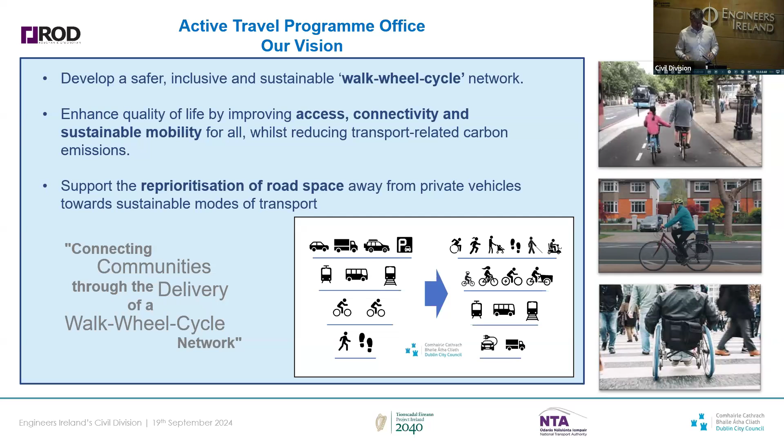So I just want to share the strategic vision that our office and the NTA have looking forward for Dublin City. There is joined up thinking. Ultimately what we're hoping to achieve is that 95% of the population will be within 400 meters of the network. I could probably do half a dozen slides on that network, and my colleagues would do a better job than I. But that is the network that we're targeting for 2028.

I appreciate it's not extremely easy to identify, but the dark blue ones there are the ones that we hope to deliver this year. So you can just about see, if the cursor will work for me. There's Clontarf to City Centre, which we're going to talk about now. Colleagues working on the East Coast Trail that opened there in the last couple of months, and then there's the Royal Canal Phase 3. There's a section of that opened up already, and so it is the hard work over the years. I'm at the back end. There's a lot of work over many years by others, and it is starting to come to the fore.

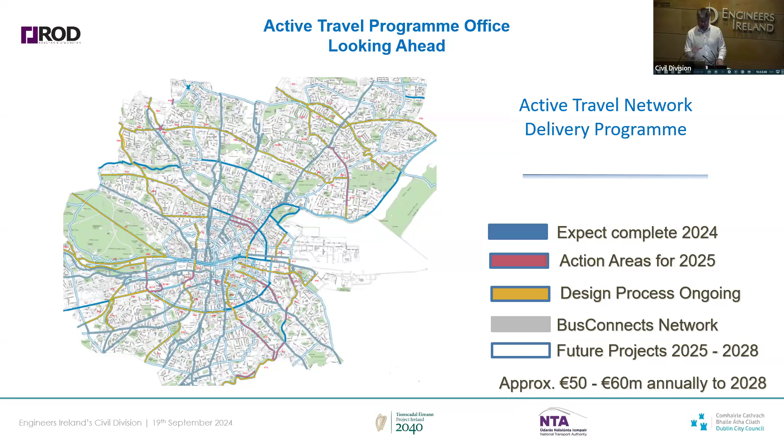There's plenty in the pipeline. 2025, you'll see Finglas Village up in the northwest, Clonskeagh to the city centre down in the southeast, and then there's more of the Royal Canal to come next year as well, and North Circular Road. Next year we hope will be a busy year for us as well, and continue getting boots on the ground and getting these schemes built. And then obviously BusConnects is all tied up in that as well, and it's essentially a cohesive plan, and there is a strategic plan there to keep going right through.

So I just thought I'd share very briefly some of it. These are the schemes that are on the ground at the moment. We were lucky. We have great delivery partners engaged with us, and the work is progressing. You can see Clontarf to City up the top.

Then there's the Dodder Greenway that opened a couple of months back. East Coast Trail, the third one that opened again. It's just opened relatively recently. You might have passed it on East Wall Road. We're down on the quays. You can see us on the quays. Just again reprioritizing lanes and access.

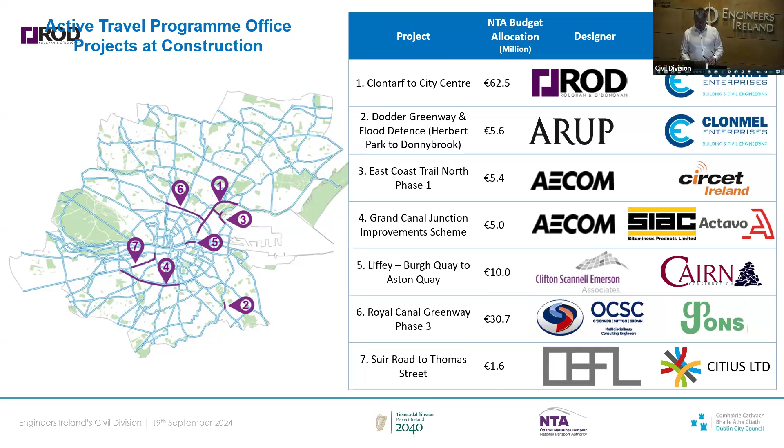And then the Royal Canal Phase 3. That's another big one that's on the ground at the moment. There's a good section that already opened, and they're on course to open the remainder of the scheme. I think it's summer next year. So they're beginning to get rolled out, and once they get rolled out, there's interconnectivity involved with all of them, and hopefully the network then will start to shape up.

Just then, we're all here. The purpose of this evening is to discuss the Clontarf City Centre scheme. As Joe mentioned, there's quite a history, and there's more people than I'll be able to mention involved in the scheme who have helped it to the point where it is today. So I think there were option assessments going back to 2012, and then it worked its way through.

We got Part 8, which was the back end of 2017. There were conditions associated with that, and there was more work for Owen's team, the ROD team, and then ultimately we went through the tender process and we landed on site March 22. March 22 is when it started. People said to me, you're 2 years, 2.5 years for a cycle track.

To be fair, as a general introduction, all the slides the guys are going to show you, it's far more than just a cycle track. It ties into the Clongriffin BusConnects scheme. We've 14 brand new bus stops that are BusConnects ready. We were the biggest water rehab scheme, I think, in Dublin.

6.5 kilometres of water main, 250 brand new public lights, massive public realm upgrades, 6 or 8 big plazas, brand new junction upgrades, kilometres and kilometres of ducting, and in general, what often goes unmentioned, the road. I think over half the area was completely brand new road construction, which is a phenomenal undertaking in the city centre. So in a nutshell, it's far more than the installation of a two-way cycle track.

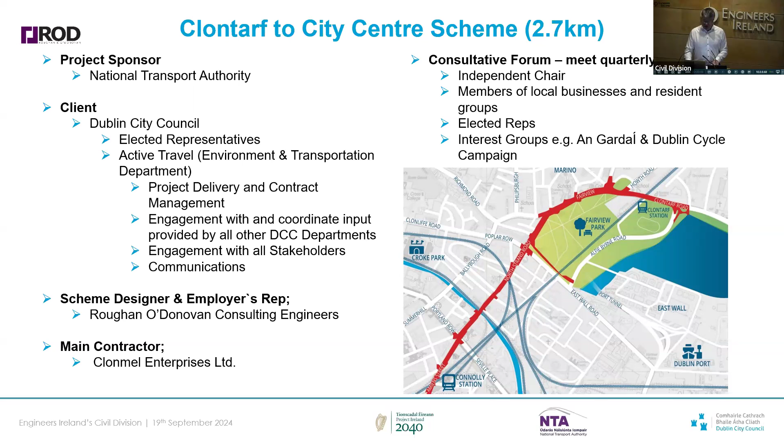There's bits that you want to communicate to the elected reps, to the interest groups, and it's been a fantastic mechanism to flag that in 2 months' time we're going to do this, or we have a design tweak that we want to do. If I was lucky enough to be on such a scheme in the future, it's been a huge benefit to us to share our proposals and share our vision and try to get as many people on board.

So my last slide, you'll be glad to hear. I just couldn't stand here today without acknowledging Chris Manzier's team and Fiona Craven. It's gone on so many years. There's a huge amount of work gone into it. But then there's also all the other departments in DCC, and for anybody delivering one of these schemes in the future, because the scheme is so extensive, it crosses so many departments. Literally the entirety of Dublin City have pulled on this one and have delivered.

There's just huge engagement. There's huge knowledge in the background that I'm learning every day. So many people are invested and have massive knowledge, and they've given us huge time, commitment, and expertise. So if anyone was involved in one of these in the future, I'd request you take the time to engage with all the departments in Dublin City, because there's plenty they can help with, and they're keen to share their knowledge. So thanks to all my colleagues there.

I will mention the business groups, residents, members of the public. We have been camped outside on the roads for the last 2 years, and there has been huge patience and cooperation. We do try and engage as much as we can, but one of these schemes can't be delivered without the cooperation of the general public. We had a significant diversion in place for 2 years, and it impacted on commuters. So without mentioning any particular group, just grateful to everyone for their patience and cooperation.

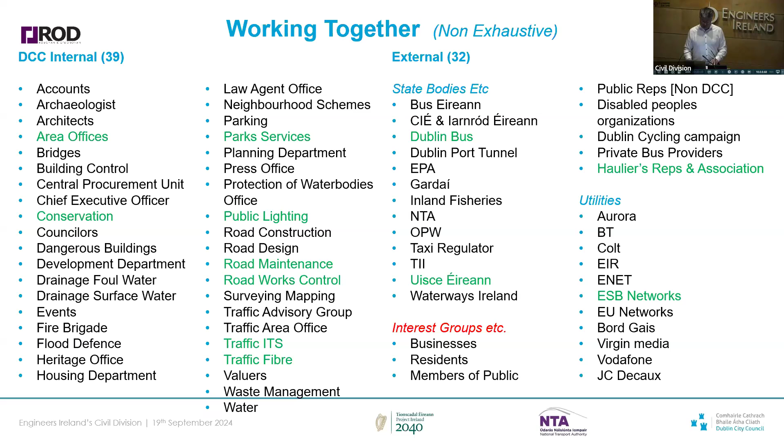So it's myself, Thomas, and Colin presenting. Thomas will go through various design details. Colin will pick up on a few more of those that he was involved in, and I'll give a general overview of various stages of the project. It's a 2.7 kilometre route, and you see some graphics I robbed from Joe here. There's an awful lot in it. Plenty of trees. We did 500 metres of the greenway along the Tolka as well.

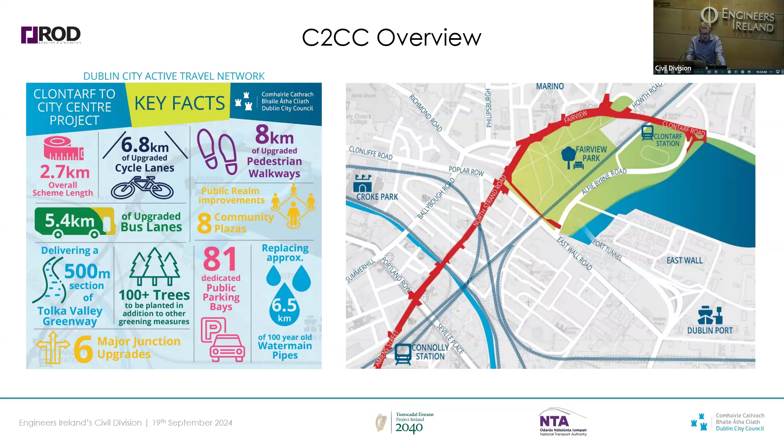That had been closed off, with antisocial behaviour under the railway bridge for years. That's open again now, and it connects to the East Wall Road scheme Joe mentioned, and also to our Dublin Port Greenway, which opened in the last few days. So it's great to see this network coming together. The guys will go through some of the complexities in the graphic on the left. So, background to our involvement. We were initially appointed to prepare the feasibility study in 2012. Then another consultant was appointed to progress the preliminary design, and that led to a Part 8 approval in 2017.

So it was actually ROD AECOM, it was an alliance commission. We did most of the design, but our colleagues in AECOM, I see a number of them here today, also very welcome. They did all the business case work for us on it.

Now, the Part 8 approval was unusual in that, well, for the benefit of anyone listening, Part 8 approval is an approval granted by the local authority to itself. So it's voted by the elected members. The elected members, though, put in a few very onerous planning conditions that took us a while to figure out. And there was a lot of controversy about trees at Fairview Park.

So the first one was to retain trees at Fairview Park, but then they introduced these requirements for protected intersections, which nobody really knew what that meant at the time, and for segregated cycling facilities at bus stops, which has given us no end of headaches for the last 7 years, and I'm sure will continue for the next 7. So basically, before we could get stuck into the detailed design, we had to redo the preliminary design.

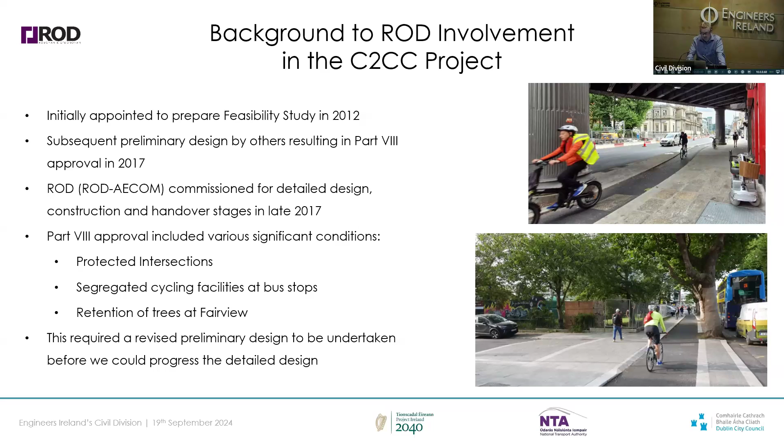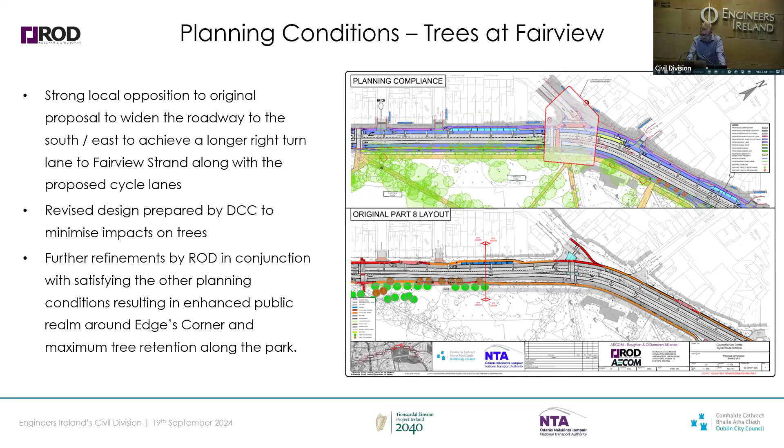So Fairview Park is a very big, fine inner city park. There were trees planted along the edge of it, and the original scheme was taking those trees out to facilitate the road widening. So we had to have another look at how to manage traffic to avoid that, which we managed to do. And so we ended up with quite a different scheme at the end of it all, but it did get us over that difficult hurdle.

The segregated bus stops, so effectively we had to separate the waiting areas for pedestrians from the footpath, because the only way to segregate a cycle track at a bus stop is to bring it behind the bus stop. You can't bring it outside the bus. So there was no end of wailing and gnashing of teeth trying to get these right, and crossings, any type of crossing is challenging for various different types of road users, and no more than all the international experience, this was a real challenge on this job. And the design of those crossings changed multiple times.

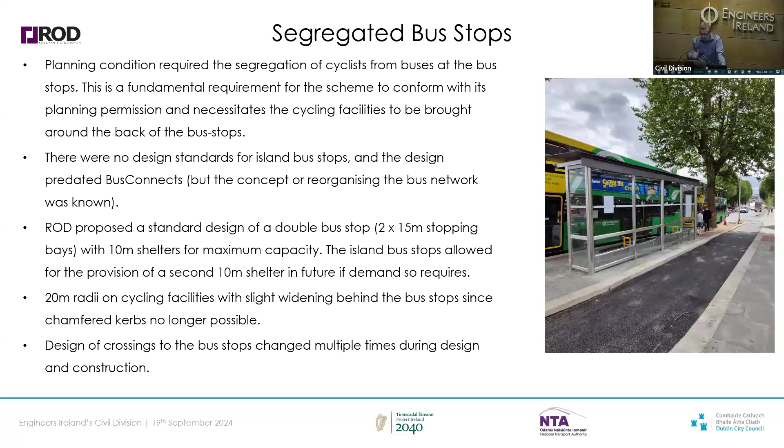When we started, it was before the BusConnects design program. The design of this scheme was basically done between 2017 and 2019. So we had no design standards to work off, so we had to devise our own design standards. And that's what you see out there today. I'm very pleased with it. We decided to allow a double bus stop everywhere we could fit it in, much better shelters than were out there, consistent treatment along the route. And then we had gentle curvature on the cycle track as you came in behind the bus stop and out again.

That's what one of the finished articles looks like at the bottom of the Malahide Road. That's Marino Crescent, where Bram Stoker is from, in the background there. This is the first picture of the scheme you see, but you see the quality of the finish everywhere on this job. This has been a very expensive job, but it's because it was done to a very high standard throughout.

So finding all the space for these island bus stops, they obviously take up a lot more room than just having a pole on a footpath, because you have to find all the space for the bus islands separate to the footpath. So that's another 2.5 meters on each side of the road. And you're trying to squeeze this into a very dense urban area. So we had to find places along the route where these would physically fit. We then had to look at what the spacing would work out at, and what that meant for services.

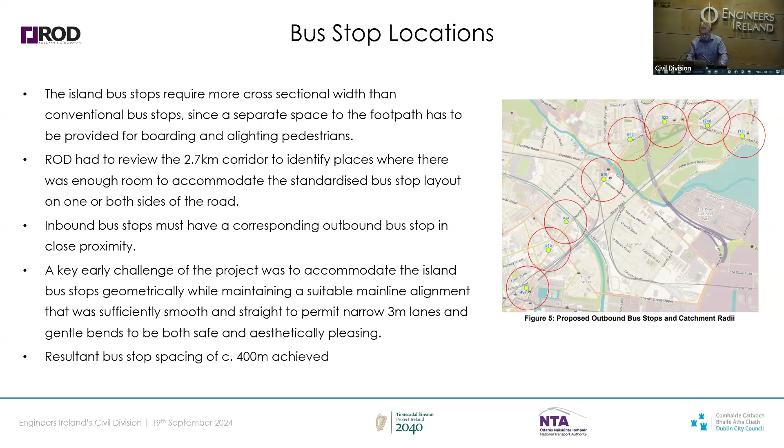And again, Joe has had no end of headaches as a result of what we did here in terms of removing bus stops and all that. But it all leads to a better service; having bus stops at fairly regular intervals, high quality, improves the reliability overall. So we moved quite a lot of them around, but we managed to do it anyway. We also wanted to keep the main line smooth so that the buses would fit in narrow enough lanes, and we ended up with about 400 meter spacing.

The next tricky one was these protected intersections, which I think were something conceptual, but didn't actually exist when we came to looking at this first. Obviously, our junctions in Ireland and Britain are different to quite a lot of the rest of the world, in that most of the world allows you to make the left turn, or the equivalent of our left turn, which is a right turn in a lot of instances, through a pedestrian crossing, whereas we don't. So you have to marshal everything separately. So these layouts became very complex. So this was actually the first one of these junctions designed in the country. It didn't end up being the first one built.

So one thing we were very anxious about, as cyclists, and I must emphasize that our team are cyclists and we look at the design from the cyclist perspective, is that you don't want a situation where the light is green for cars and red for bikes at the same time, because cyclists will just ignore it. I mean, it's hard enough to get cyclists to pay attention to traffic lights at the best of times, but if you antagonize them, they'll absolutely ignore it. So we had to find a way of running the things together.

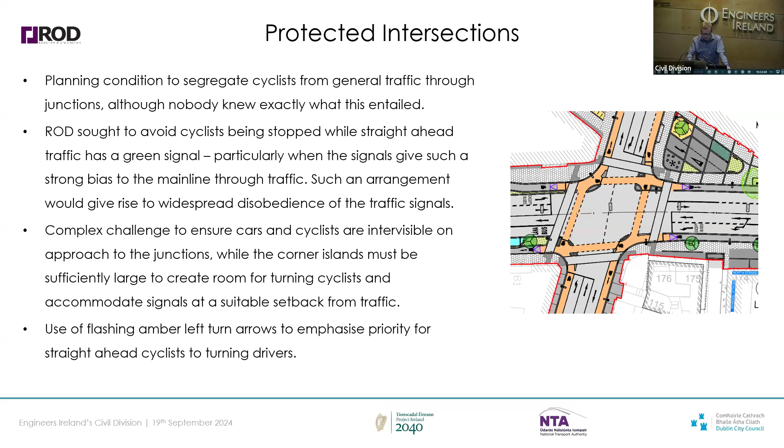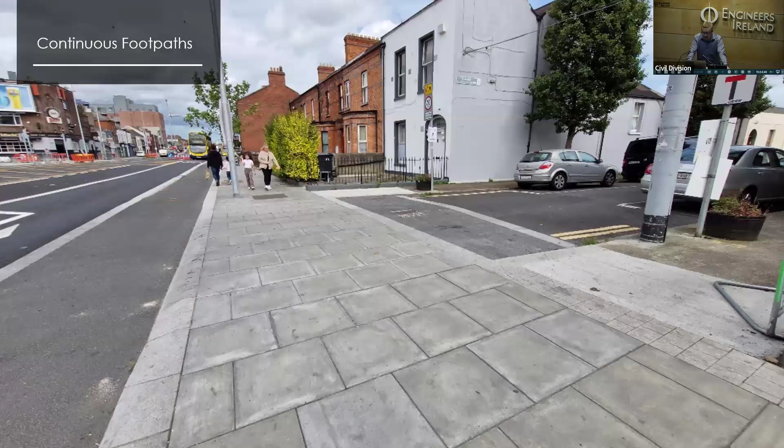Continuous footpaths. This is something I'm really pleased with on the scheme. I'm really proud of what we've done here. We've changed the priority at minor side roads. And again, we were out on a limb here, but it was one of the first real positive reactions we got from the public when the first one of these opened. There's no doubt looking at that the footpath has priority, the cycle track has priority. More recently, other guidance has come out suggesting there might be tactile paving back a little bit from it. That obviously wasn't out when we designed this or when we built it. But I'm pretty happy with how it's working as it is. We have to build things sometimes and see do they work or not.

Other issues we had to come up with: we had the cycle tracks under the Loop Line Bridge. We had to tie into Newcomen Bridge, which was actually built as an enabling work for this job. We had to move the retaining wall you see on the bottom right, the historic wall coming up to Newcomen Bridge, out into the road and rebuild it. The greenway through the park, the Tolka River Greenway under the bridge. We had to adjust some car parks, a lay-by at a school. And what you see at the top right is how you switch from having one-way cycle tracks on both sides as you come to the Clontarf Promenade to bring it all together. So that was a bit of a challenge as well. But look, I think it's worked out fairly well.

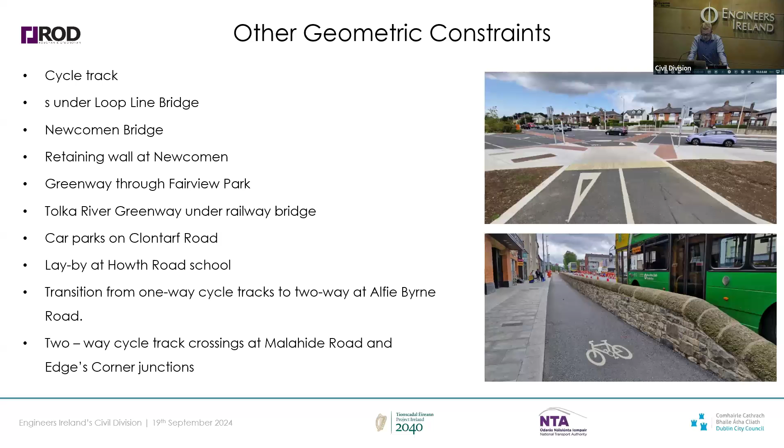Even though it's gone on 2.5 years, the job could not have been built if we had to keep all the traffic on the road during construction. So DCC went to great efforts to persuade the project team, their colleagues and the elected members that we just can't take everything through this space and build it at the same time. It'll take 10 years. So after a lot of persuasion, the road was closed to inbound general traffic. So we then had a bus lane inbound, a bus lane outbound, and an outbound general traffic lane. We had actually proposed initially only having one lane outbound and having a cycle lane each way as well, but the NTA wasn't happy with that.

And in hindsight, it's just as well, because if we'd had the 2 cycle tracks and the 2 traffic lanes, we would have had much less scope to do some of the awkward connections. Whereas when we had the outbound bus lane and the outbound general traffic lane, we could close the outbound bus lane for periods, and that gave us scope to do stuff in the middle of the road that would have been impracticable otherwise. So the diversion went on for over 2 years.

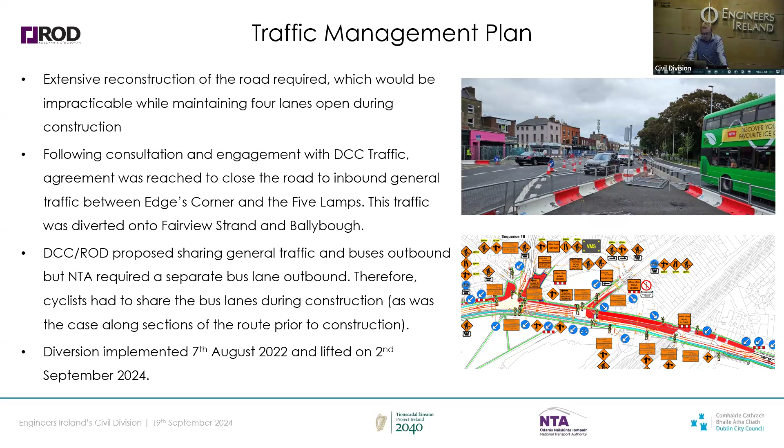And, as Joe has said, I think the project team is extremely grateful for the forbearance of the public and the businesses during that period. But hopefully the end product is worth it. We then had to deal with land acquisition, approvals, working around structures, duct approvals, the business case. Of course, AECOM had to put long hours into getting a business case to justify the kind of expenditure we're talking about here. But the business case was positive for the scheme, was quite positive. And I suspect, if anything, the benefits will continue to grow.

Site compounds. This is something any of you working on BusConnects are no doubt aware of, but it is extremely difficult to get site compounds in Dublin. And the closer you get into the city centre, the harder it gets. So finding areas where we could store all the materials needed for this job was a very big challenge at the start of construction. And it took a lot of negotiation by Joe, Victor and that team to make it happen.

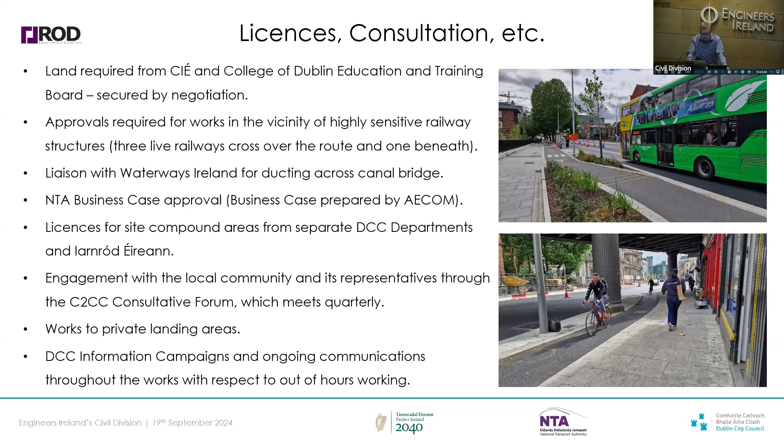The consultative forum Joe mentioned has been running since more or less the start of our involvement in the project, and it is by far the best thing we've ever done on a project like this. Getting everyone involved in it. It got to the point where the people on the consultative forum were going out selling the scheme to their neighbours, which was brilliant because they became part of the project team. So I'm going to hand over to Thomas now, who will run us through some of the utility design stuff.

Hi, thanks. So, you're probably looking at the photo to start and saying that's not the same guy. 7 years later, lost a head of hair, got 2 kids. I don't know which to link to losing the hair, the project or the kids.

So I'm going to talk through utility design, the SuDS implementation on the project, pavement design, contract documents production, and then also a little bit on the consultation with the various people. So a huge part of urban city centre design and construction is the utility design. We had 15 different utility providers through the site. By far, ESB, Eir, and the DCC departments were the ones we engaged with the most, due just to the quantity of ducts and everything else that was in the system. On the right there, you have some details of the quantities. I'm going to go a bit more into the traffic signals and the water mains.

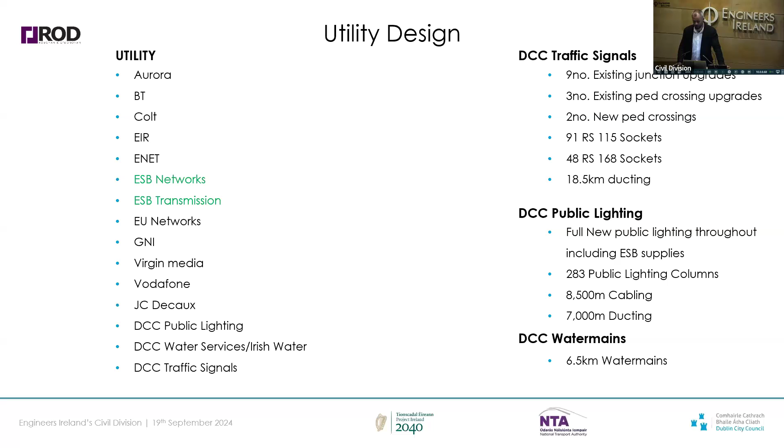So, for the public lighting, it was a full new public lighting scheme throughout the whole route with 283 new lighting columns, which is a huge amount, 8.5 kilometers of cabling and 7 kilometers of ducting to facilitate that. And all of these was a new ESB supply as well. So just on the traffic signals, because there were nine junction upgrades, 3 existing ped crossing upgrades, 2 new ped crossings, there was a huge amount of infrastructure there that we needed to design and change. 91 RS115 sockets, 48 RS168 sockets, ultimately resulting in 18.5 kilometers of ducting, which included 1 ways, 2 ways, 4 ways, 6 ways. And it's a huge undertaking to provide new traffic infrastructure around every junction.

I don't know if anybody's aware of the DCC standards, where you have a 6-way loop around the junction, while keeping the junction live. Getting the new system in while maintaining the existing was a huge challenge. The picture in the bottom left shows some of the ducting that you see going into chambers. That's including a new 4-way fibre link that we provided for the whole scheme. And that fibre link allows DCC traffic management to actively manage each of the junctions here. It provides them with a new link up to Dublin Port Tunnel. The system that they were working on up to the completion of the scheme was through small patches of their own ducting system and rental from other utility providers.

It just really wasn't ideal. They were over capacity. They needed more capacity, and it's a great win for them, because then they can actively manage all of these junctions at times of congestion.

Just for the detailed design, as you said, there's 91 RS, 91 115s, 48 168s. The picture there at the top right is one of the sockets, and you can see the scale of the foundation required. So this is to go into a junction, and you've seen the 5-lamp junction. It's a very constrained site. We've got about 10 or 12 of them in that area. So you have to look at the diversions, you have to look at what's the existing, what's proposed, getting power to it, getting comms to it.

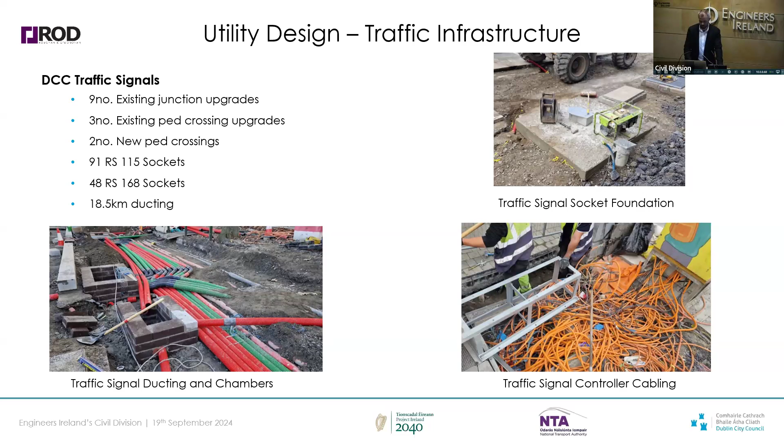So just on the utility design process, we look at it in a sort of 3-step process, where it's identify everything you have, verify, and then into design. So some of the design tools that you can use to do the design is utility records, which we all know can be not worth the paper they're written on, but it gives you a good general idea of what infrastructure is along the route.

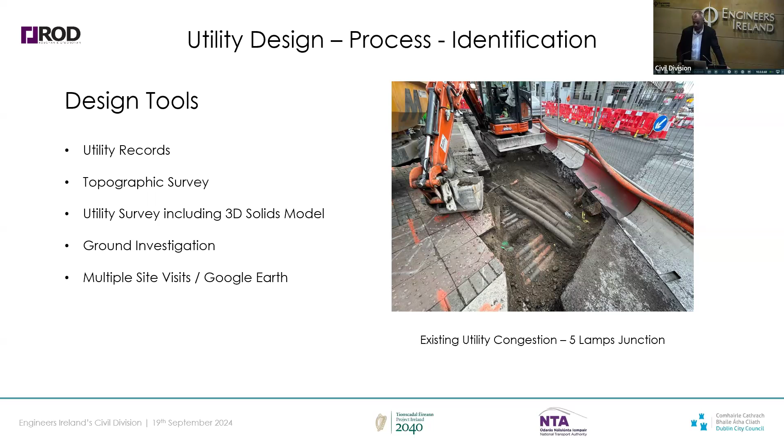Next, your topo survey, your utility survey, your ground investigation, and then site visits. And I put in Google Earth because it is a great tool. You can pop down to the point of the street, zoom in, and you can tell if a chamber is Eircom or if it's ESB or something like that, just about by the markings.

So for the verification, as I said, we had a GPR survey. I'm going to focus on the GPR survey and the slit trenching. So on the left there is a GPR survey for the 5 lamps junction. You can see that that's all of the existing network. You can see there's very little road space left when you're looking at it in that network, and each of these is just a 3D polyline. It doesn't fully take account for the diameters and other things for the utilities.

And then on the right there is the slit trench. Our original GI contract had a huge amount of slit trenching, which we thought was required. It was pared back for a number of reasons. It was traffic management, cost, time, a lot of things. But it is immensely important that you do the slit trenches to verify your 3D survey, your 3D utility survey.

I still think the 3D utility survey is the best tool we have. It gives you a better idea of the full spatial of a lot of the utilities. But you do need to do the slit trenching, especially in these urban environments. It might have saved us some headaches if we had a little bit more slit trenching during construction.

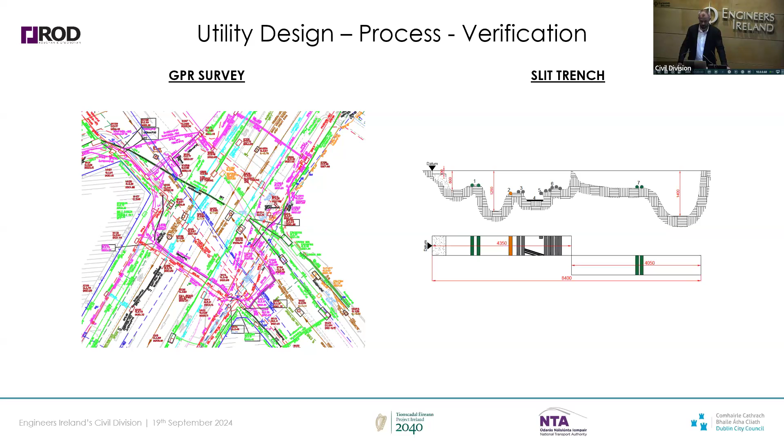And then on to the design process. So we have a 2-step design process. It's a 2D design and then a 3D spatial design. So you see there on the right, that's a 3D solid model of our existing utility survey. So you can see the complexity and the chambers, the different ducting, the big brown pipes going down the middle.

They are existing combined sewer systems, where at some sections of the project we had 4 of them across the road, which made it hugely difficult to get any other sort of infrastructure in. Majority of them are quite deep, but it still can be quite challenging.

So our 2D design, we initially do our planar clashes with the new infrastructure. So we bring in everything that's a sort of immovable object that we don't have any scope over. We bring in our lighting, our gullies, our tree pits, our bus shelters, traffic signal pole, foundation, drainage. They're sort of all immovable objects that are part of the scheme, but we can't really move that far. So that then identifies what our diversions are. And a lot of the water main design came out of this.

Once we put all of our infrastructure in, we had so many water main diversions that it was just a patchwork of the existing and proposed. And that sort of twigged in our mind that this is not going to work. And we started talking to Irish Water about a full diversion across the whole scheme, which was a benefit because a lot of the old water mains were located in the path. So when we could move them out of there, it freed up a lot of space for other infrastructure.

And then we went on to the 3D spatial. So we had to strip all of the diversions out of the model, bring in all of our proposed, and then we went through a Navisworks clash detection operation. So we know the limitations on GPR and utility surveys. It has its tolerances of where it might think the service might be.

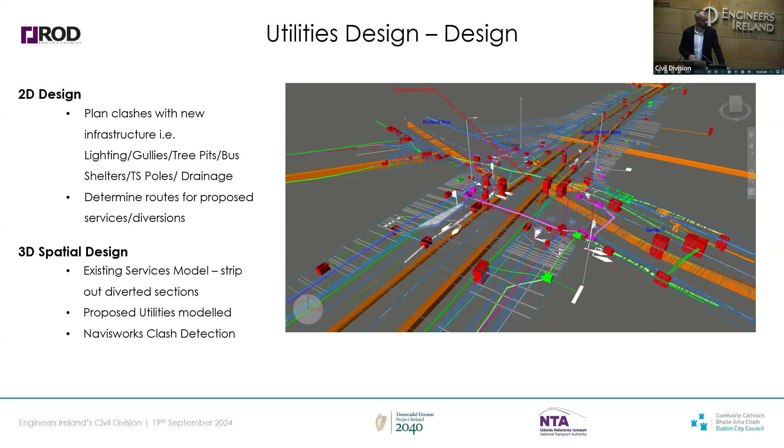Just onto the water main. So as Joe said, it was the largest single water main renewal project in the city to date. So we had a huge amount of existing water main across the route. You can see there on the right, everything from the 1900s up to the 1950s, of every conceivable size. We have hydrants, sluice valves, butterfly valves, meters, bulk meters, and associated telemetry.

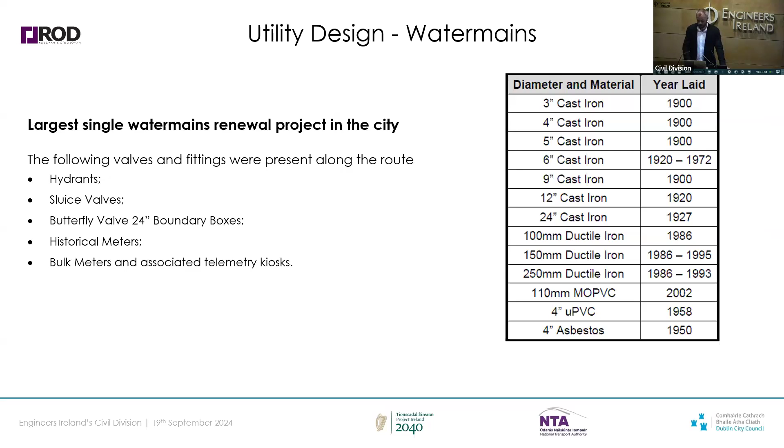DCC and the NTA did a huge amount of the heavy lifting with Irish Water to get this across the line, which was great. So the proposed design in the end had nearly 6,400 meters of water mains, 236 sluice valves, 56 hydrants. We had 108 bespoke connections.

So when we looked at the 3D spatial design, we initially started, as every engineer does, with the Irish Water connection detail. But then we started looking at that. There was so much congestion that it wouldn't have worked. Your sluice valve might be 5 meters away purely because you wouldn't get it in spatially. So we came up with 108 different bespoke connections. When we sent them to Irish Water, we only had a handful of comments back, which was a huge win for the design team.

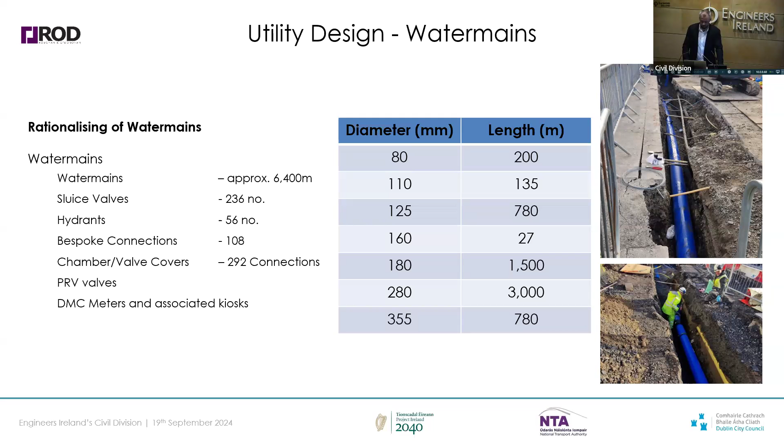So on the right there, you can see the different lengths and the different diameters of the water main. So the majority of it was 280 mil OD. They're the main trunk mains down either side of the road.

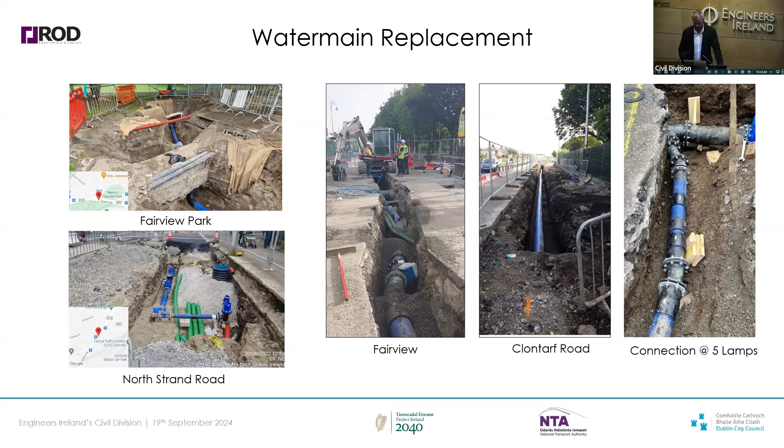The other images show the complexity of the different trenches trying to get the water main through. On the far right, the connection at Five Lamps, you can see that this was all detailed. All of these blocks were detailed. The T-pieces were brought in, all of the bends. It was a huge undertaking. We're very proud that we got there.

So I'll also then talk about the tree pits, and I can't take all of the credit here. We have our partners, our landscape architects from CSR, with us today, who put a huge amount of effort into these and a lot of consultation with DCC Parks. So we started looking at tree pits. We had a talk about, was it the Stockholm system? Was it the crate system?

The Stockholm system gives nutrient-rich aggregate for the tree to grow in, and the crate system provides a void filled with nutrient-rich material. Ultimately, with a lot of consultation with DCC Parks and their experience, and they will be the maintainer, their preference was to go with the crate system. The crate system has its benefits. If it was the Stockholm system, a third party might come along and just think it's normal soil, dig through it, ruin the root ball, ruin the roots, kill the trees.

So if a third party contractor does come here down the line, they'll see the crates and hopefully leave them alone, allowing the tree to grow naturally and healthily.

So when it was coming to the construction or the design, the shape is not necessarily the most important factor, especially when you're in an urban environment. You're not going to get that perfect square and depth every time. It was the volume. Once you get the volume for the tree to grow into, so that it has enough soil to establish itself, then as it propagates into the ground around it, it should thrive.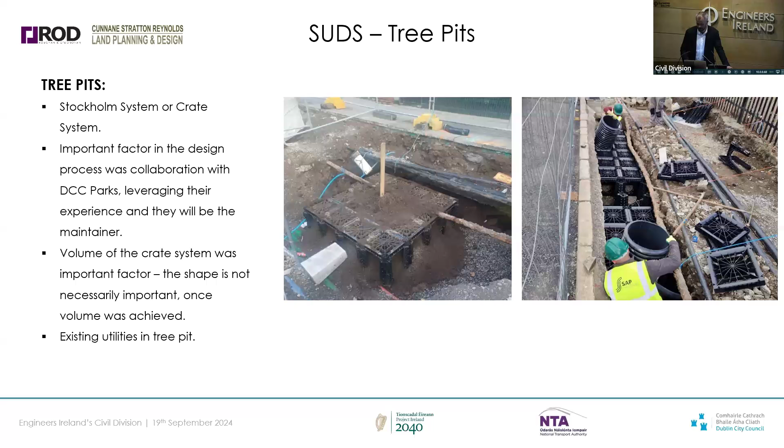And existing utilities was a big issue as well. So we did a huge amount of work on it. Some services we left going through the tree pit because it was acceptable. Others we diverted. Anything proposed, we diverted. You can see the image there on the right. That's actually 2 tree pits that are linearly connected together. So that's a much bigger area for the tree to go into and hopefully thrive and be there for another 100 years, like some of the trees that are there already.

Just some images of the complexity during construction. You see some of the existing utilities are wrapped in root barrier to make sure no roots get in. You can just about see the crate system here that's been slotted underneath the existing utilities, and this is infrastructure to allow air and water into the root balls.

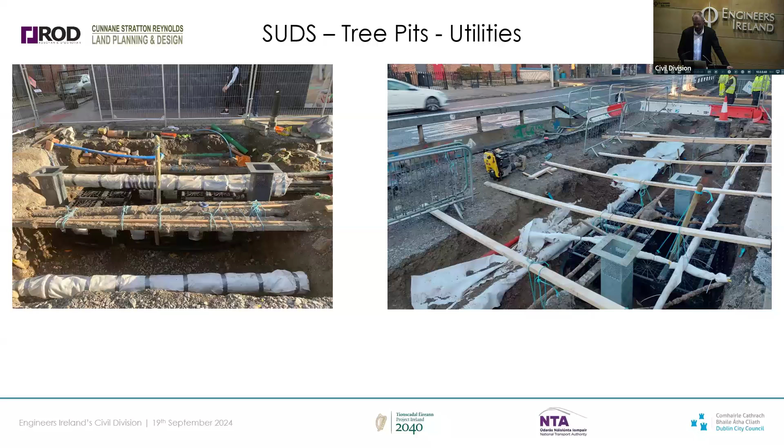Just a special note on these. Anybody who's gone through detailed design, these are ESB, very immovable, cause a lot of problems on site. Get water into them, they break, cover over, and then the ESB come back 6 months later and dig up everything we've just done. So it should be noted that they should be dealt with special care or diverted at best.

Just some more images of the trees as they come up out of the ground. So you can still see the crate system just here, and then a bit of a surround, and the tree will go in here. So give it the best, and then some of the finished product there on the right. I think it was very successful. I think we got through it on site pretty well, and I think everybody's happy with the trees going in.

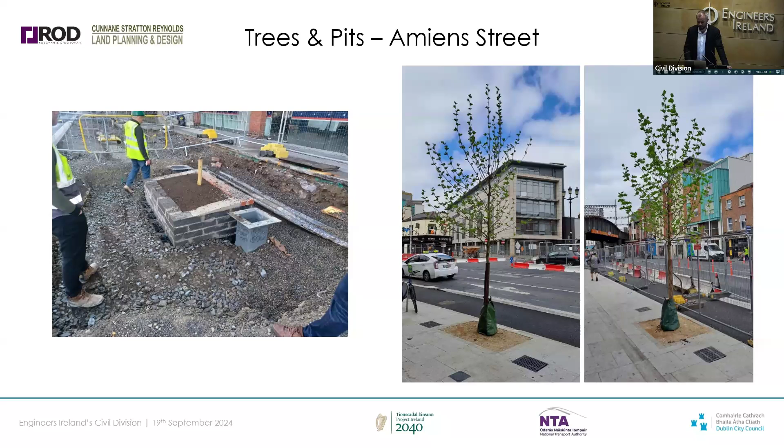It brings a lot to the streetscape, I think, especially for a commuter route where previously it's a sea of grey and buildings and tarmac and cars. It does change the appearance of a road greatly.

Another part of the SuDS elements that we tried to implement was bioretention areas. So the design intent for this was to manage the carriageway runoff locally in small sub-catchments. A lot of the route was served by the combined sewer, as I said. So every time it rained, water went into the gullies, the combined sewer, and then down to Ringsend. So it's putting Ringsend under huge pressure that carriageway runoff is being brought down there to be processed in the Ringsend facility.

So we have 2 types of bioretention areas. One was impermeable and one was permeable infiltration. We went across the whole site. We looked at various different locations along the site where we could do it. So pull-ins for parking bays, anywhere that we had sufficient footpath space, was there space behind us. We initially identified 92 different locations, and then we went on to assess them.

The three main criteria we used in the assessment was geometry: could we alter the local levels to allow the water in? What sort of utility congestion was there? Is it buildable? And then suitability. So some of the sites were just too small. We said it's not really worth providing a full bioretention or infiltration area. But they were used as just over-the-edge grass, greens, landscaped areas.

I think we initially ended up with about 10 going to construction. Some were pared back. We ended up with 6 after construction. And the only one that we couldn't build, we changed into a landscape over the edge, so it was still taking some of the runoff. And that's in addition to a lot of the other grass areas we have.

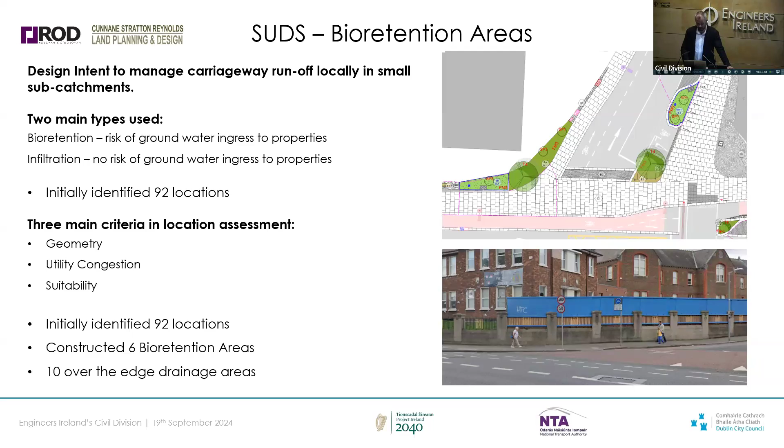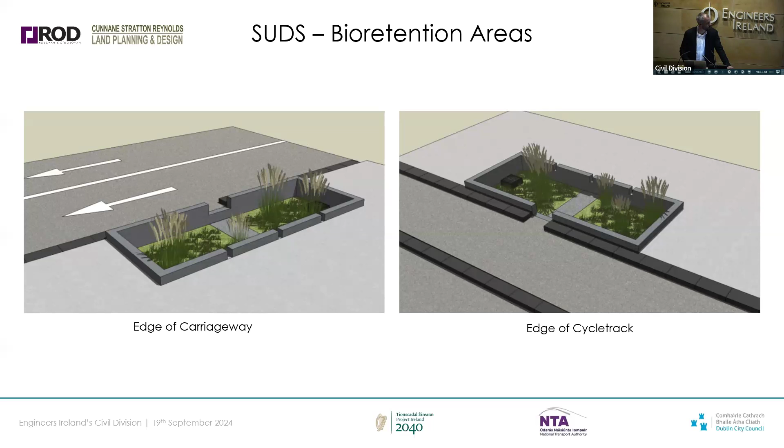So the two types of bioretention area we had was edge of carriageway and edge of cycle track. So the operation is the water comes off through the gap onto a spillway to slow it down, so it doesn't erode the soil in it, and then into the landscaped area.

So the construction detail, and it might look a bit OTT, but when we looked at it, especially the edge of road ones, the soil within the bioretention area is a high void, non-compacted soil. So when it's right beside the road, we were concerned that over time the road would just slip into the bioretention area and be a huge maintenance problem for DCC going forward. So at the road edge, we have retaining walls, just to keep the carriageway up and take care of the wheel loading.

So on the left, the permeable bioretention area, the function of it is water goes in, permeates down, some of it evaporates. We put in a sort of fail safe that if in any scenario the water builds up in the system, we had an overflow gully that went back out into the drainage system. And then the impermeable one was just lined with a liner.

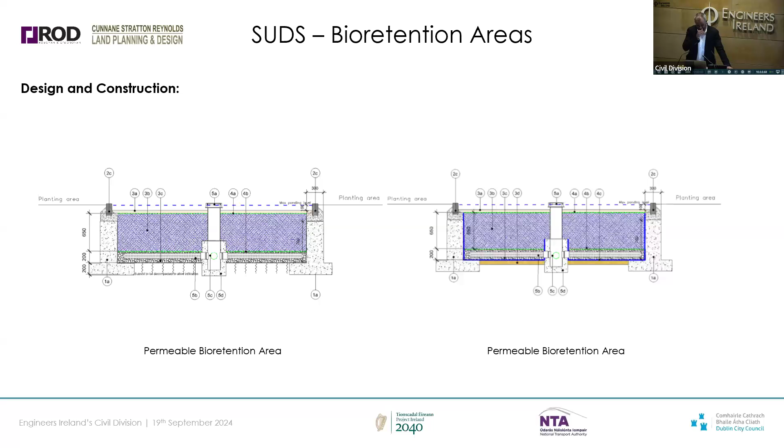So the difference was in the city centre there were a lot of basements, so we were concerned that additional groundwater into the location of these basements might add water into these basements and ultimately undermine the foundations or just flood them. So around a lot of this area down Buckingham Street where we have these, they are just bioretention areas.

So just a couple of images. The one top left is the rebar fixing prior to concrete pouring. The next stage then is the concrete pouring on the right. So you can see the scale of them in the back. So they are quite large. There's a sizable amount of water that can be held in them even after the soil is included. And then the image there on the bottom left is the finished product, which, as I said, adds a lot to the streetscape, never mind also providing a function of reducing runoff.

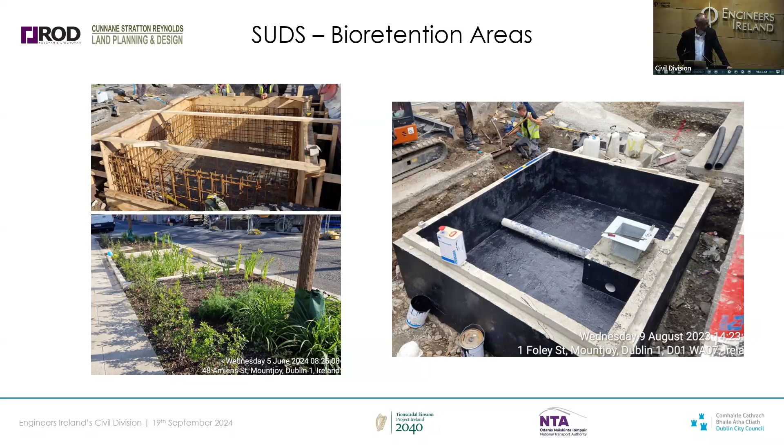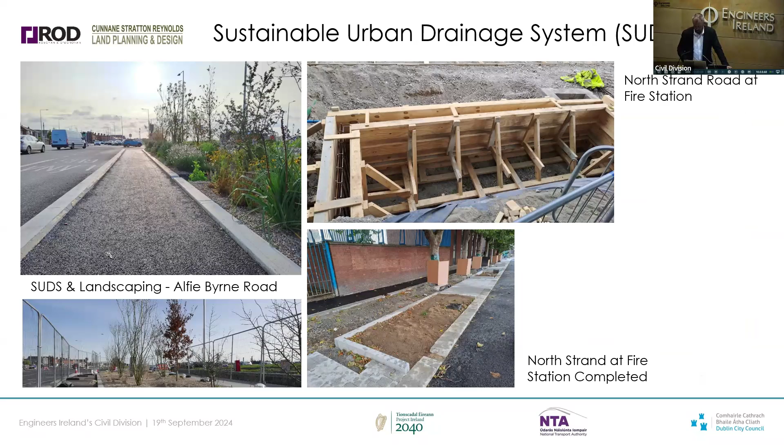So Owen has put me under pressure here to crack on.

So pavement design. As Joe said, there was a huge amount of full road pavements along the whole scheme. We went through some different steps: visual inspection, FWDs, GPR surveys, pavement cores. So they all sort of determined where there was visible deterioration, rebuild, where the FWD or the GPR or the pavement cores indicated that there was insufficient depth in pavements, or the subgrade was degraded, and that was replaced. We also looked at existing trenches and proposed trenches; in a lot of places there were just so many trenches that there was very little existing road left. So that all went as full reconstruction as well.

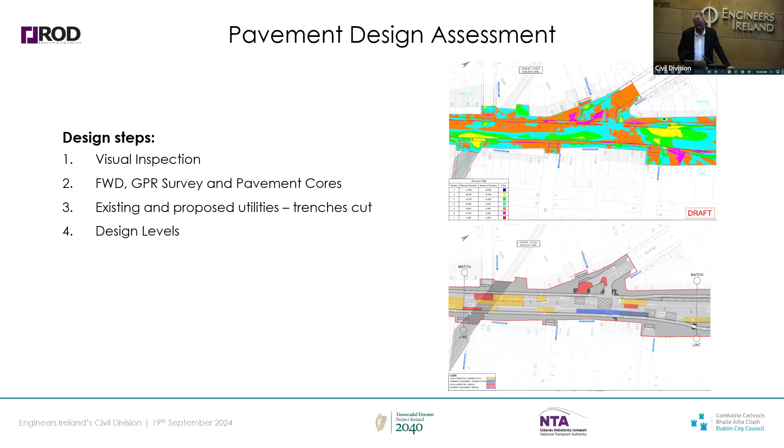And then also design levels. The image there at the top right is a heat map from the proposed level. Each colour is a different distance, either above or below the existing ground level. So we looked at each location, if it was 50 mil, 100 mil below ground level or above, and that also determined where we needed full depth reconstruction.

So just some quick images. Just to run through, we had full depth reconstruction. We had plane and inlay of 100 mil. We had plane and resurface that was just the wearing course. And then one or two other different tie-in areas. Each of these had a Glasstex layer. The full reconstruction had a geomembrane at the bottom as well.

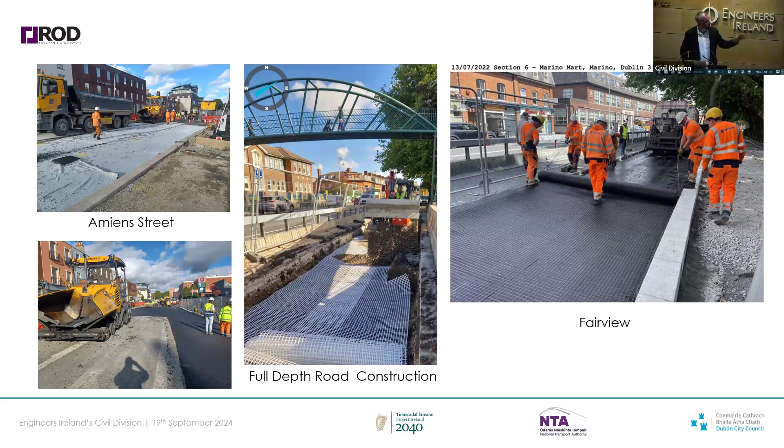The Glasstex works very well. We put it on S2S many years ago, which was a concrete road underneath the wearing course. And 10 years later, there's still no reflective cracking or anything like that. So if you are doing pavement works within the city centre, it will give you a lot, putting in the Glasstex.

So the challenges during construction: we had to get a lot of additional pavement cores. When we got there on site doing slit trenching, we found in a lot of places closer to the city centre there was road on top of road on top of road, which wasn't ideal. And then also traffic management, which Joe alluded to already.

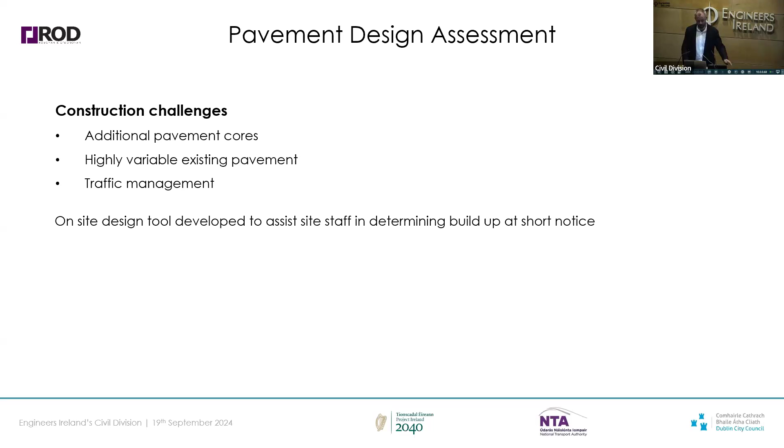It was very challenging to do a full road reconstruction in the city centre with that level of traffic, and I think DCC traffic pushed their limits to make sure that we got there. And also we developed an on-site tool for site staff to determine build-ups at short notice.

So on contract documents, it was a very, very comprehensive contract document. It was a PW CF3, nearly 700 pages in the specification. We had a pack of 708 drawings. There was 308 pages in the pricing document. I think there was 20 odd pages of alterations to the TII method of measurements. And I thought it'd be interesting for people just to have a look at the split of the costs in the BOQ.

So obviously it's urban, with a bit of urban realm, a lot of granite, so the curbs, footways, paved areas is one of the top percentages. Next would be the pavements, utilities, earthworks. The earthworks also includes demolition of any old chambers. Preliminaries, water mains, 7%, landscaping, which was huge.

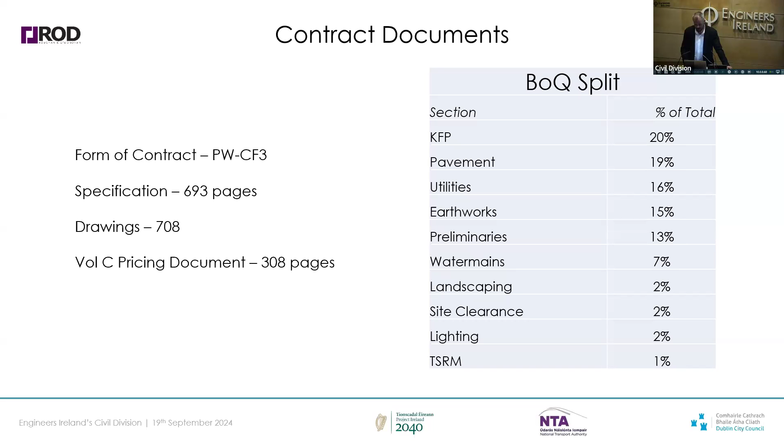Site clearance is an interesting one. I think we had 3,500 items of existing infrastructure that was above ground and into the catalogues. Each one had something different to be done. Some was kept, some was binned, some was back to store. And lighting at 2% and the traffic signs and road markings.

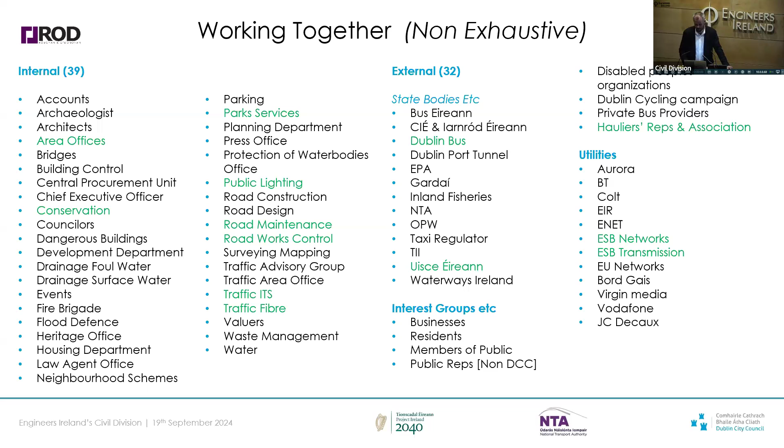Okay, so this is a repeat of what Joe's slipped in here. So there was a huge amount of people that we had to consult with over the 7 years that we've been involved in this project. And it brings a huge amount when you engage with these people. They are the departments that know their assets. They are the maintainers. So it's always good to consult with them and collaboratively get a scheme that works best. So I think I'll pass on to my colleague Colin.

Thank you. Thanks, Thomas. So I'll take you through some of the finer details. For example, curbs, as you see here. So for the grade separated and fully segregated cycle track to work, it was necessary to design all the curb types from scratch. There were different curb types used for various scenarios, such as at side roads, cycle tracks, and at bus stops. In all, 28 different transition curbstone types were used to tie the different curb profiles together. So you see them there in the bottom right, the various different transition stones. So they were end of curb pieces or drainage channels, slot cuts, that kind of thing.

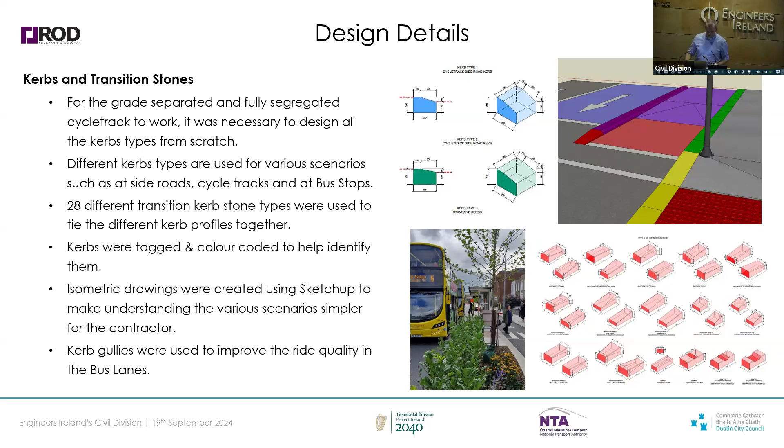Curbs were tagged and color coded to help identify them on the drawings. And isometric drawings were created using SketchUp to make understanding the various scenarios simpler for the contractor. So the SketchUp model on the top right there shows how we color coded all the curbs, and it made it a lot easier to identify how to construct things on site. We also used curb gullies on the bus lane to help improve the ride quality for the bus lane.

So on the scheme, there were several interesting structures, and probably the most notable of all was the Connolly Station Wall on Amiens Street. So to create enough space to facilitate the inbound footpath and cycle track, it was necessary to acquire a strip of land from CIE at the Amiens Street offices. A section of the CIE retaining wall and railing were then realigned. To ensure that this was done with the utmost sensitivity, a 3D Revit model was completed to facilitate accurate drawings to be developed. The railing was carefully dismantled and repaired off-site by Bushy Park railings.

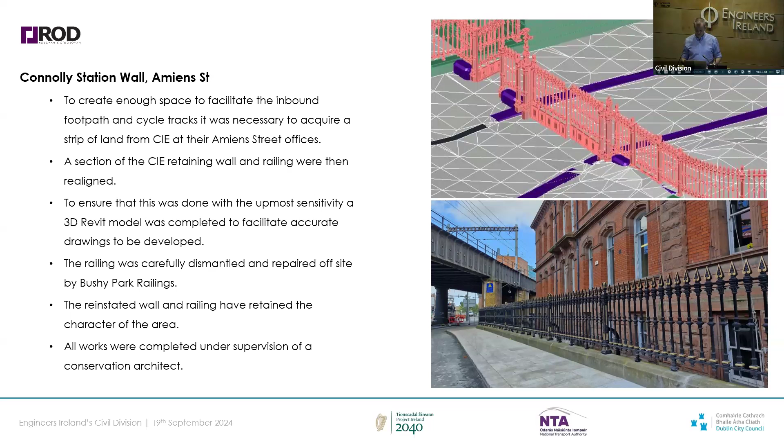The reinstated wall and railing have retained the character of the area, and all works were completed under supervision of our conservation architect on site. The image on the bottom right there is the railing as it stands at the minute, and I think it looks great, to be honest. Probably looks better than it has done in the last 60 years.

Nice lick of paint. Another structure was the James Larkin House wall on North Strand Road. So to create enough space to facilitate the inbound and outbound cycle tracks, it was necessary to acquire a strip of land at the James Larkin House residential complex to construct a new retaining wall. During excavation for the wall, the remains of some houses which were damaged during the World War II North Strand Road bombings were uncovered, and an extensive landscape and planting plan was implemented when the wall was complete.

So that image on the bottom right there is the finished product with our trees going in, and a lot of work from CSR going into that too. And our exposed aggregate concrete path there, I think it looks pretty good.

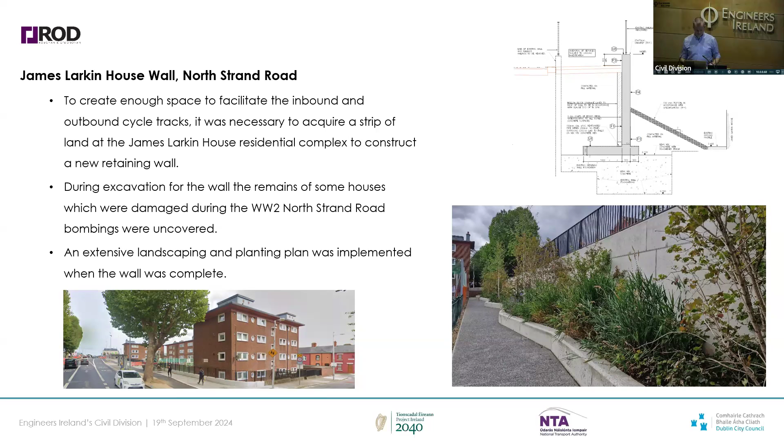The North Strand Road wall. So as part of the scheme, this was realigned to make room for the inbound footpath and cycle track. The wall was carefully rebuilt using the original stone to retain the character. The reinstatement of this wall was actually so important to Dubliners that it became a topic of discussion on Liveline. And we're obviously glad to report that Joe is happy with the finished wall. There's been no complaints since.

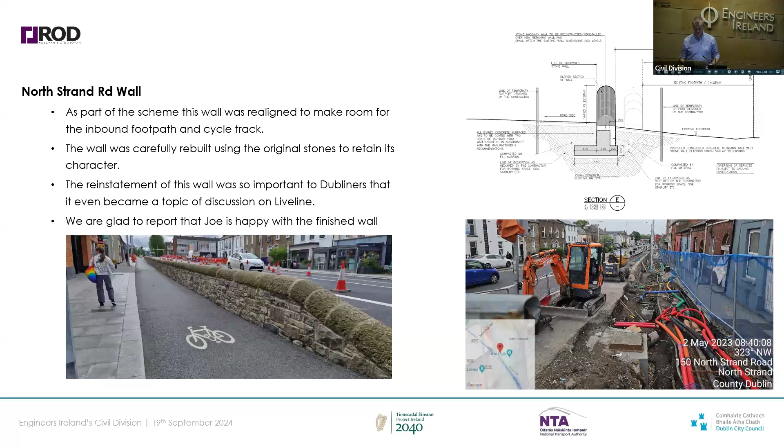Signal installation. So an interesting aspect to the scheme is the use of cantilever traffic signals at the junctions. Cantilever traffic signals were introduced at the junctions as most of the central islands were removed throughout the scheme. Installation of the large cantilever sockets was a challenge given the number of existing utilities in the ground. The image below there shows one of our cantilever sockets, the 250s, and the number of utilities around it, and a lot of the foundations had to be bespoke designs.

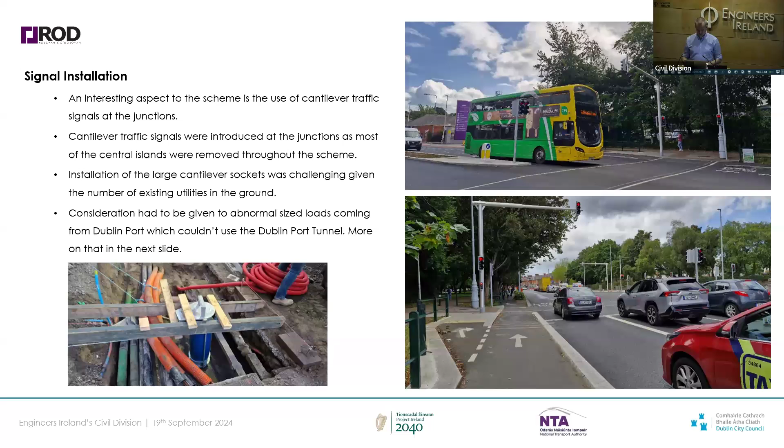Consideration had to be given to abnormal size loads coming from Dublin Port, which couldn't use the Dublin Port tunnel. We'll discuss that now. So it was a design requirement to maintain access between the Alfie Byrne Road and the Malahide Road for oversized vehicles coming to and from Dublin Port. A comprehensive assessment was carried out on the proposed layout to ensure that there would be no clashes between these vehicles and the proposed street furniture.

So the image on the top right there is one of these oversized vehicles as it passes beneath the Northern Line rail bridge, and it just gives you a sense of the scale of these vehicles that we had to accommodate. We were also required to install 2 swinging cantilever signal poles on the Alfie Byrne Road.

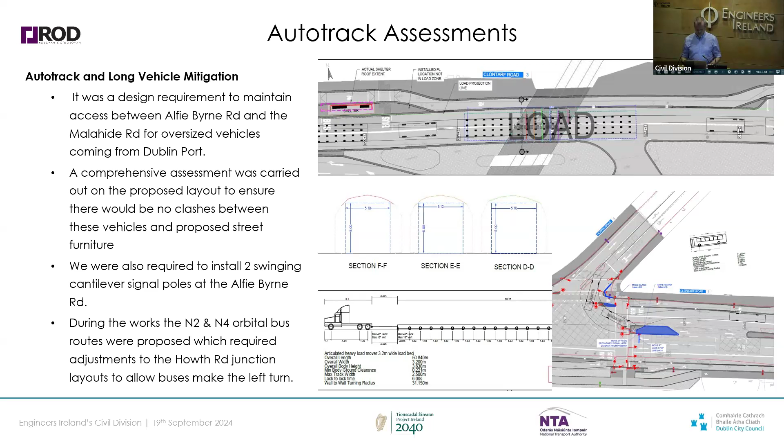And during the works, the N2 and N4 orbital routes were proposed, which required a slight adjustment to the Howth Road junction layout to allow our buses to make their way through. So the image there on the bottom right are the tweaks that we had to make to the central islands and stuff on the Howth Road for these new electric buses that the NTA have purchased. And I think that's back to all.

We were aiming to be done by 7:15, and we have abjectly failed at that. So sorry about that. But you could have spent half an hour talking about an awful lot of those slides, and hopefully Clonmel will add some of the detail in a future presentation, but even how the railing at Connolly Station had to connect to a particular type of stone and not the other type of stone, and the issues we had there. I mean, it was really huge. So look, I'm going to fly through this.

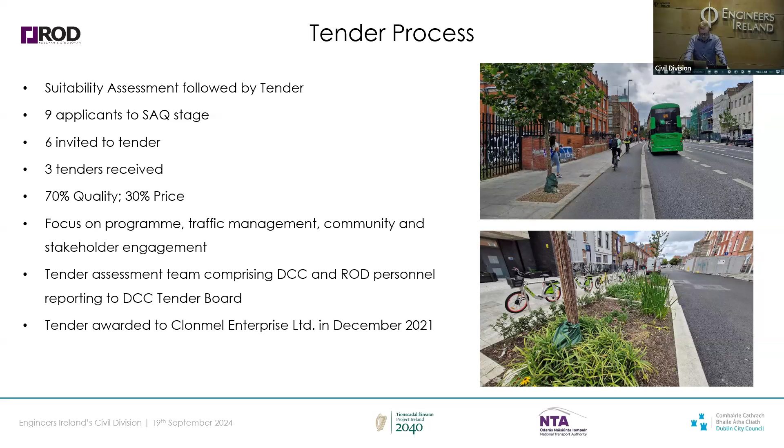The tender process, we went from 9 to 6 to 3. Fair play to DCC and the NTA. They agreed. We were trying to impress that the importance of getting the quality right on this job was so high, to get the traffic management plan right, to get the communications right, to get the program right, to get the resourcing right. So this is probably the first job like this in the country which was awarded more so on quality than on the price aspect. Anyway, Clonmel ended up emerging out of that December 21 and started work in March. So there's the official launch, a number of the local councillors and Oliver from the NTA, and that was the Lord Mayor at the time.

So then the construction was originally envisaged 600 days, which, I mean, we all knew was unlikely to be achieved. But if we had said 800 days, it would have taken 1,000. So the hope was if we said 600, it would take 800. It's more or less done now.

There's a last bit. Thomas mentioned the electricity cables. The ESB have done their best to help us through the job, but the ESB are being pulled every which way. These old dilapidated cables are a disaster. They just keep blowing. I think on other smaller jobs around the city, since DCC has got the ESB to go in there first and fix their cables before they ever start, I would highly recommend that for anything like this again, because when an ESB cable blows, everything has to be stopped.

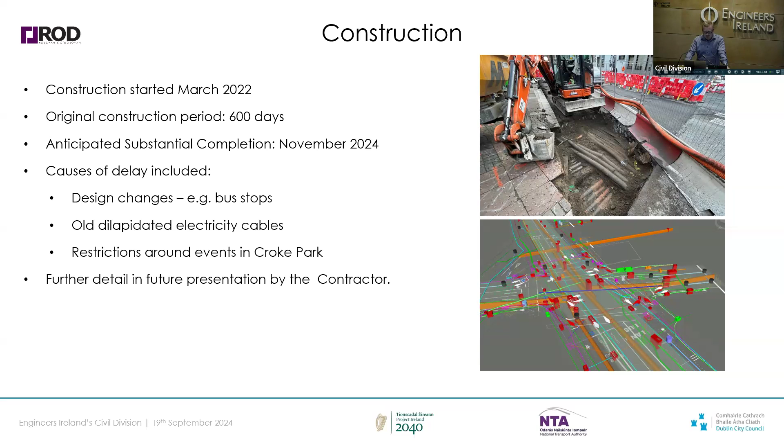We obviously then, because we overran the 600 days, we got into another summer, and there was, I don't know how many concerts in Croke Park that summer. And then someone thought it was a great idea, for the first time ever, when we were starting such a big roadworks job, to do concerts in Fairview Park as well. So we had 2 weeks of that every year.

Principal construction challenges. So, I mean, we've been through a lot of it. I mentioned the site compounds, really big issue. Getting all the DCC departments aligned in time to keep the contractor moving. Joe's team has worked tirelessly on that.

Then changes, like you always have changes. The bus stop crossings have been a nightmare. Oversized vehicles, we had to make tweaks for those. Add bus stops back in, which I won't say any more about. Additional accommodation works and heritage lighting columns.

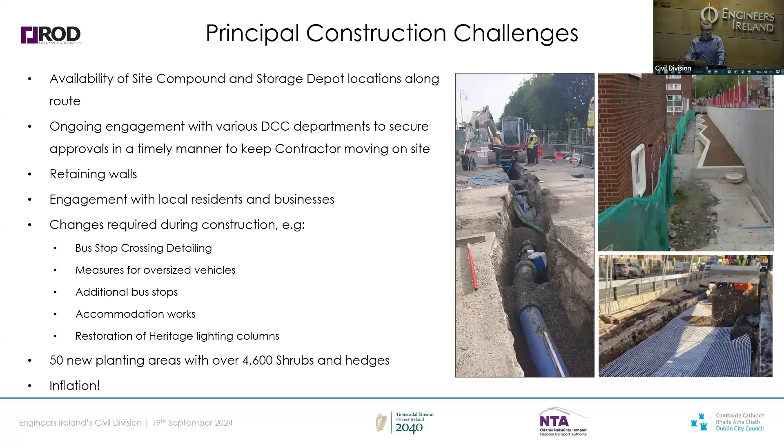They look innocent enough, these lighting columns, but they're extremely expensive, extremely fragile, and it turned out no one actually knew what was in them when we went to take the first one down, but we got through it. And of course, inflation. I don't know if this is absolutely true, but it's definitely around the same time. The day we started on site was the day the war started in Eastern Europe, and we immediately had 10% inflation.

Lessons learned. This consultative forum, I've said it already, Joe has said it, has been fantastic. And the engagement from the councillors and the public and the guards and the Dublin Cycling Campaign, Cyclist.ie now, has been fantastic.

Probably the drainage. Yeah, we walked it in the rain the other day. Nothing is ever perfect, but we could definitely have put one or two more gullies in the cycle track. Every gully looks like a small little thing above ground and is about that size below ground. So you have to move all the water mains and the sewers to get it in, but it would have been worth doing in one or two areas.

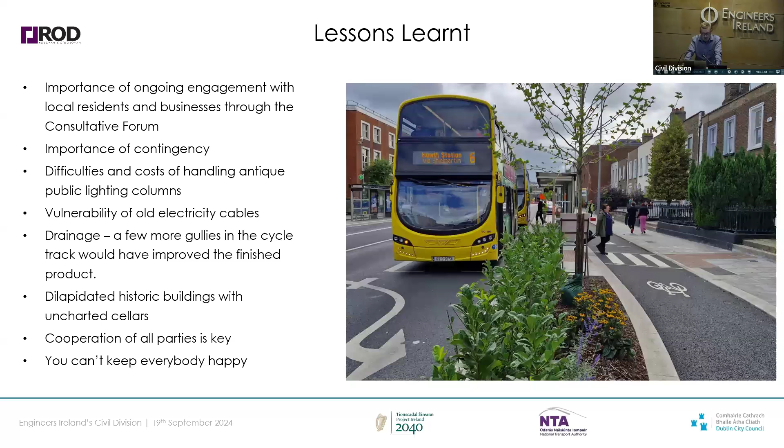We had problems with one or two old buildings, one in particular. But look, we had great cooperation, and we just have to accept that you can't keep everyone happy all of the time. So in terms of thanks to the consultative forum, to the DCC team at all levels, Brendan and Andy were the directors and Chris was the deputy director. We've had 4 DCC project managers on the job over the course of the project, and I'm delighted to see Fiona here tonight. Victor is off sunning himself.

The DCC project engineers, poor Joe has had to deal with the worst of this over the last 2 years on site, but Pádraig did his time before that, and before him, Tony Magee as well. And we had the rest of the site team, John, Mohammed, Tony, Kiaran and Michele, the planners. We can't do justice to all the DCC departments who were involved in this, all the people that helped us. There are too many people to thank. So I won't risk naming any because I'll just offend those I leave out. But it did involve huge cooperation from all the departments.

The funding agency, of course, Iarnród Éireann and CIE, really helpful to us. Irish Water, Stephen Burke, who was the senior engineer in DCC Water at the time of the design, moved over to Irish Water. It was brilliant. They took the opportunity while we were building this job to do all the water mains, and they paid for them. That's great interagency cooperation. We've mentioned CSR, AECOM, Kevin Cleary did the public lighting, and Peter Monaghan, of course, was the road safety auditor who gave us a 70-page safety audit for the stage 2. But as ever, Peter was extremely helpful to us getting through it.

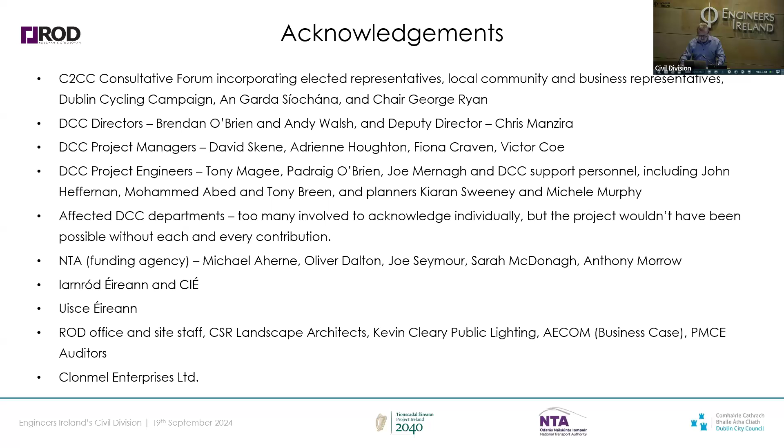And last but certainly not least, Clonmel. When Trevor heard we were giving a talk on how good the design was tonight, he went to the lash, so he's not here to join us in despair. But Clonmel have been super, and they've been brilliant dealing with the local community.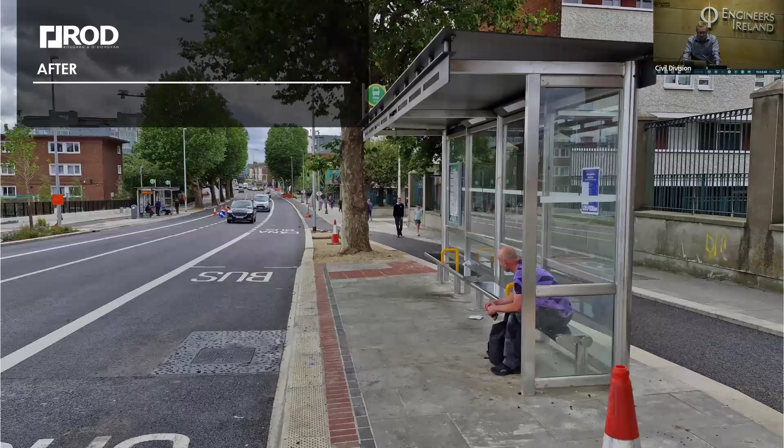So just a few before and after pictures to finish up. That's what it was. That's what it is now. I think the way we've managed to stitch the old materials and the new together, I'm quite pleased with how it's turned out. And again, we managed to keep a lot of these old trees and fit our new infrastructure around them. So you'll be very relieved to hear that's it.